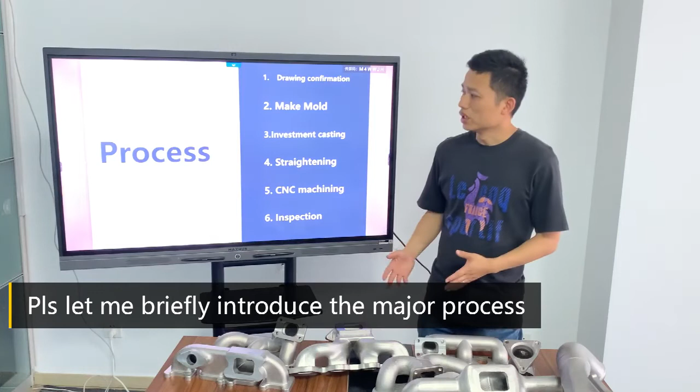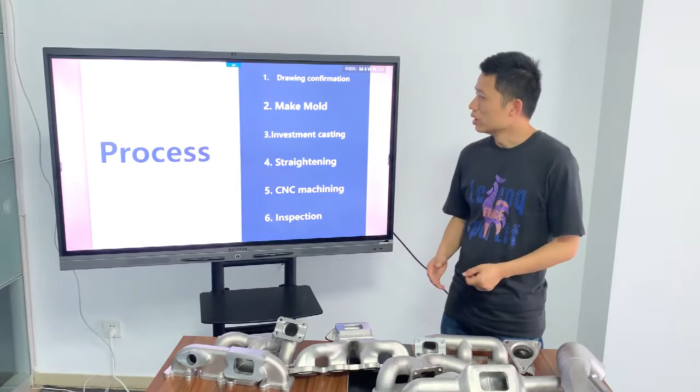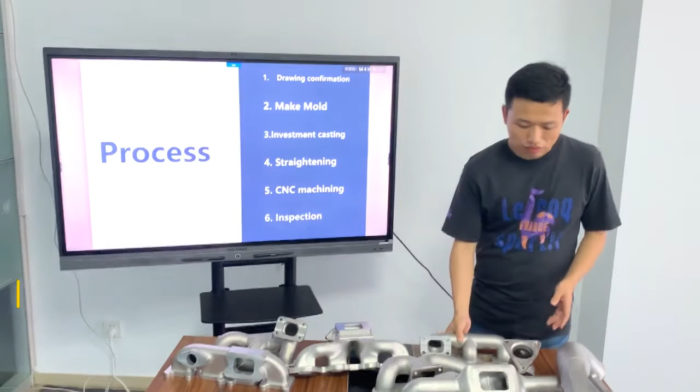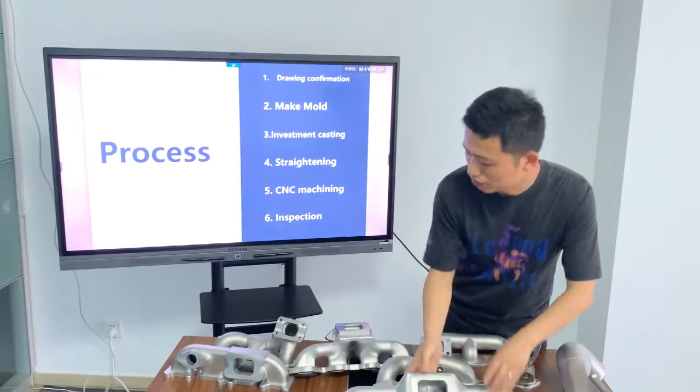Now please let me briefly introduce the process. It can be divided into 6 major steps. The first one is confirm the drawings, and once the drawing is confirmed, we need to make the casting mold. Number 3, it's very important to do the investment castings. Once the investment casting is like this, this is the investment casting part without machining. Once we got the investment casting parts like this, we need to do the straightenings. I will explain it later. The 5th step is to do the machining. Then we need to do the inspections. Now let me introduce the details.

The first step is to confirm the drawings. It is very important because we make the mold according to the drawings, and some drawings are scanned according to customers' samples. It is very important to confirm the drawing at the beginning steps.

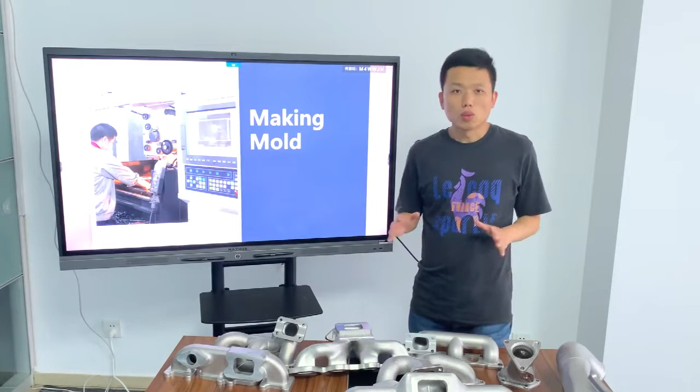Once the drawing is confirmed, then we will let our mold supplier make the mold. It is not easy to design and make the mold for the stainless steel exhaust manifold. The engineer needs to consider many things, such as the pour gate, the runners, and sometimes they need to use computer simulation to check if the mold design is correct or not.

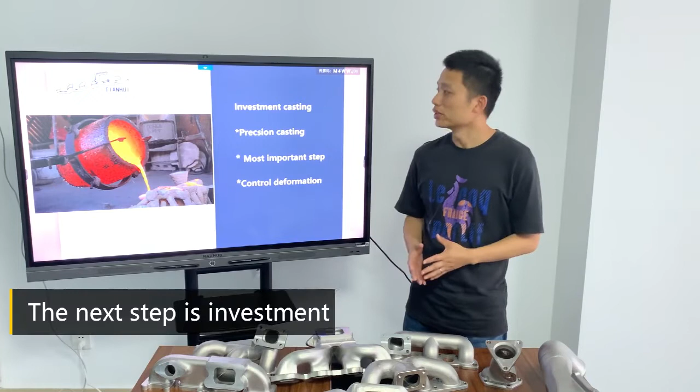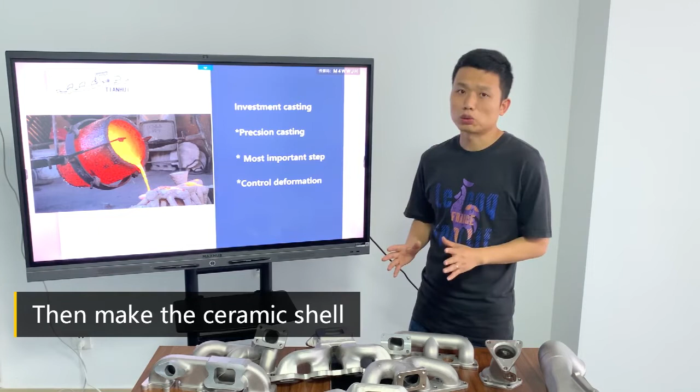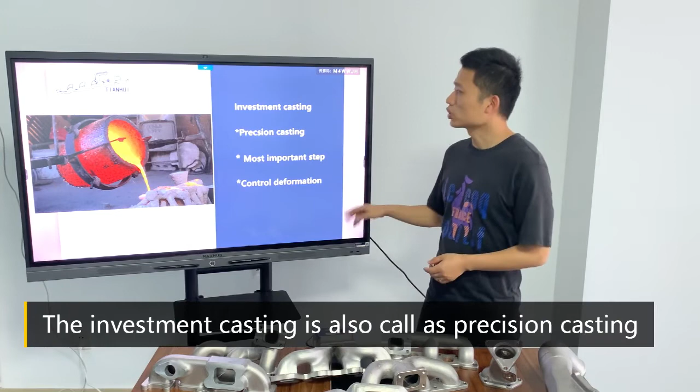Once we receive the casting mold, the next step is to do the investment casting. The investment casting is a very complicated process. We need to make the wax patterns, then make the ceramic shell, then pour the melting stainless steel into the ceramic shell to get the casting parts. The investment casting is also called the precision casting. It has a lot of advantages, such as a very small casting tolerance, very smooth surface qualities, and sharp details.

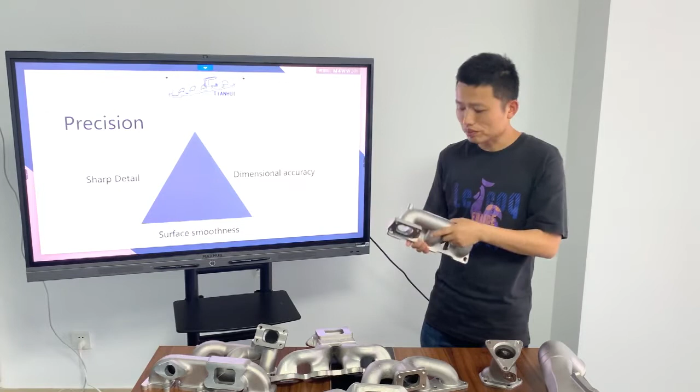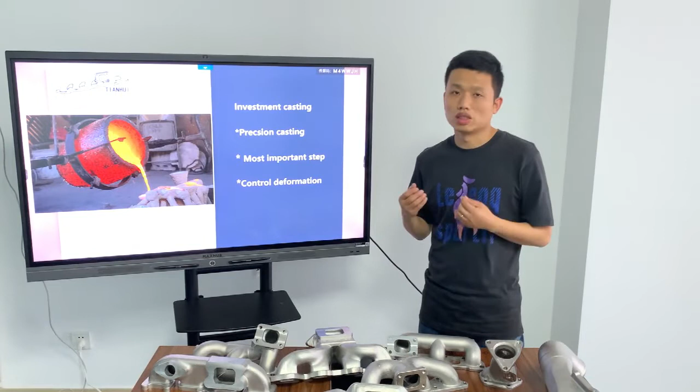The investment casting is very important. It is also very difficult, as the engineer must overcome many difficulties, such as deformations.

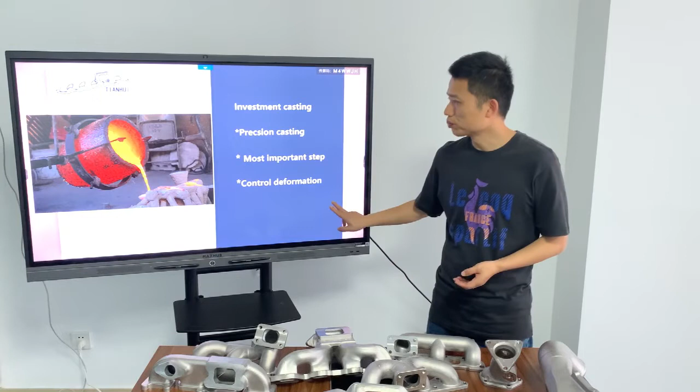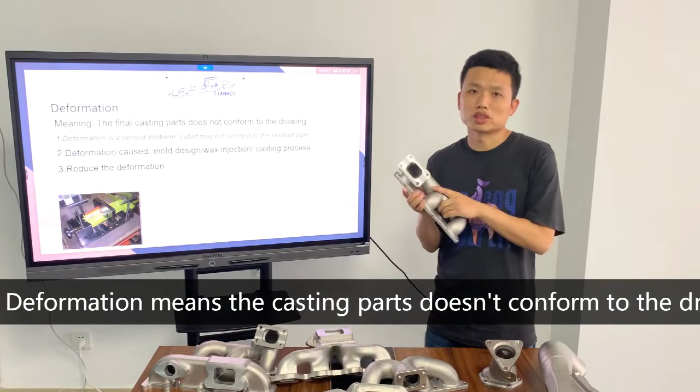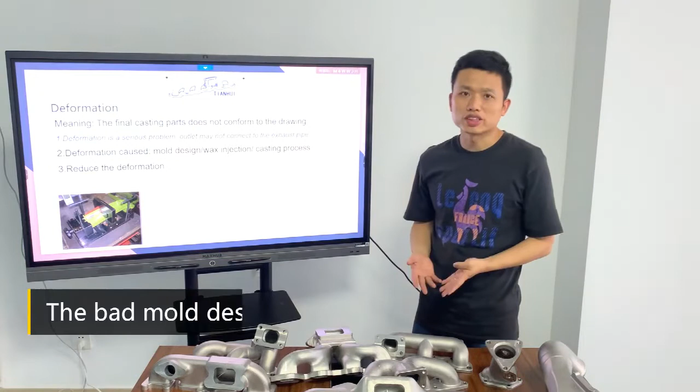What is the deformation? Deformation means the casting parts do not conform to the drawings. It is a very serious problem because in modern cars, the exhaust manifold is fit into a very small space. If the casting part is deformed, the outlets like this maybe cannot properly connect to the exhaust pipe. So it is a very serious problem. The deformation can be caused by bad mold design, high wax pattern temperatures, wrong casting process, things like this.

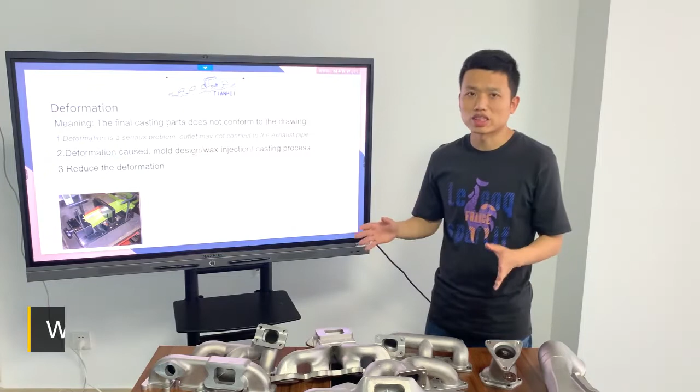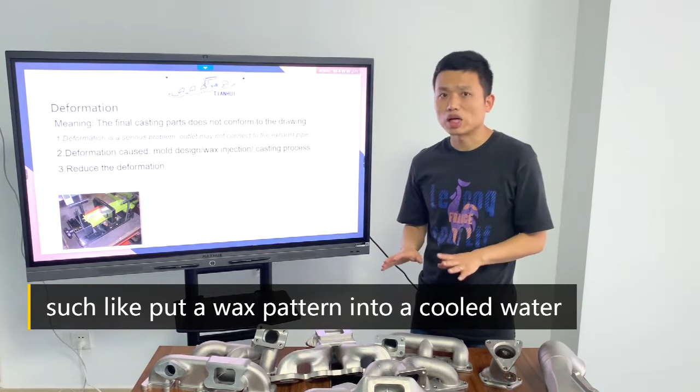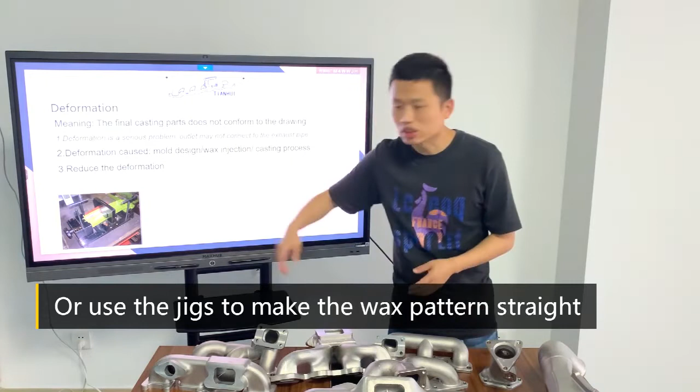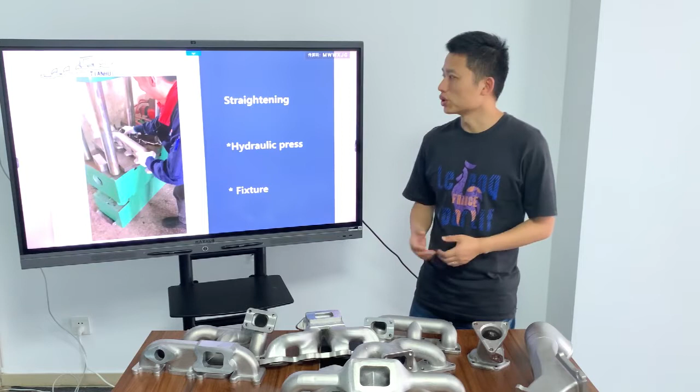As casting foundries, we need to do our best to reduce the deformations. Our engineers have rich experience to control and reduce the deformations, such as putting the wax pattern into cooled water to reduce the temperature, or using several jigs like this for the wax patterns. Although we have to do our best to reduce the casting deformation during the investment casting process, sometimes the casting part is still deformed. Then we need to do the straightenings.

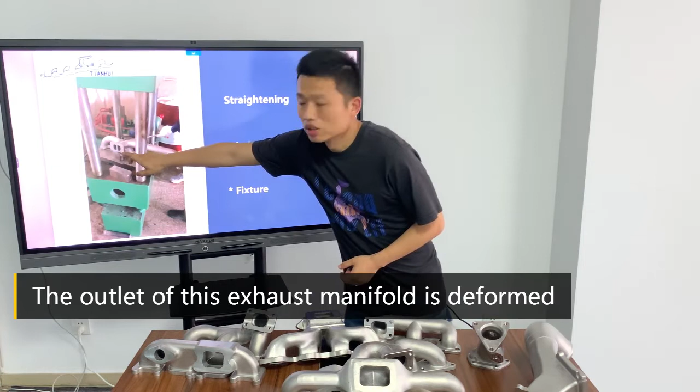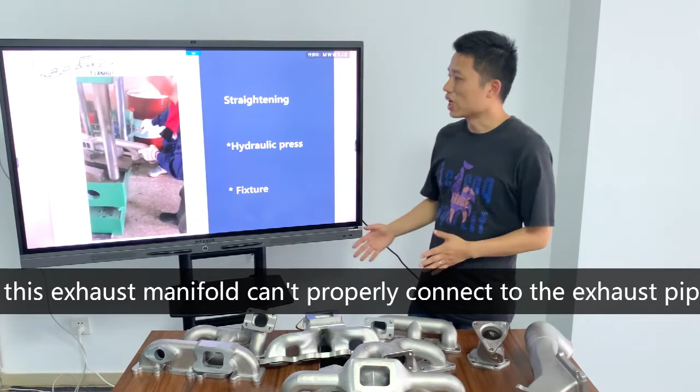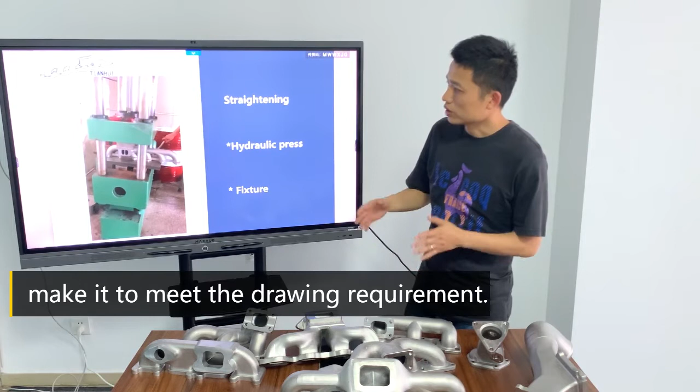The outlet of this exhaust manifold is deformed. If we don't deal with it, it can't properly connect to the exhaust pipe. So we must do the straightening. We use the hydraulic press to press this outlet, so make it reach the drawing requirement. So this is the straightening.

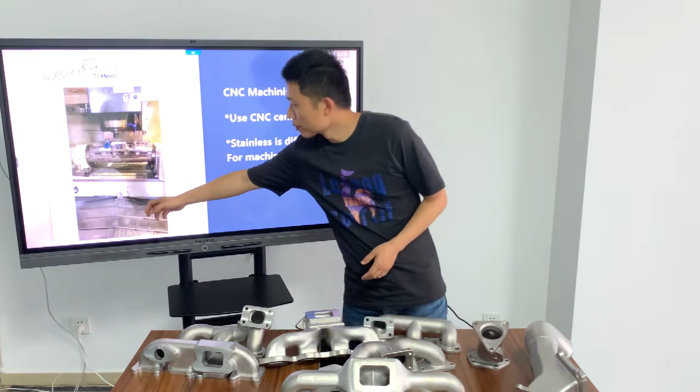It is very important. The fifth step is to do the CNC machining. Please watch this video, as you can see we have 4 CNC centers. This is the 4 CNC centers. We use the CNC center to machine it, so it has a very small tolerance. The machine surface quality is also really good.

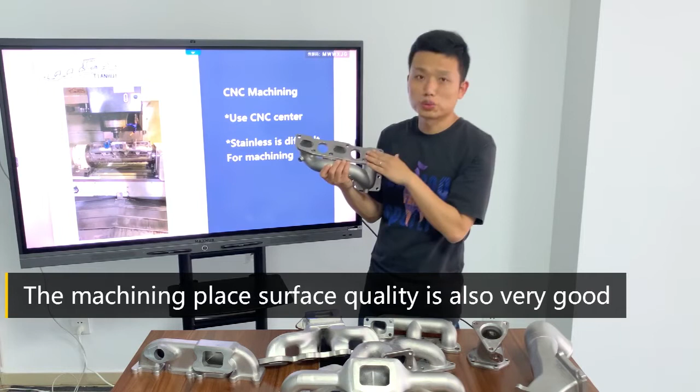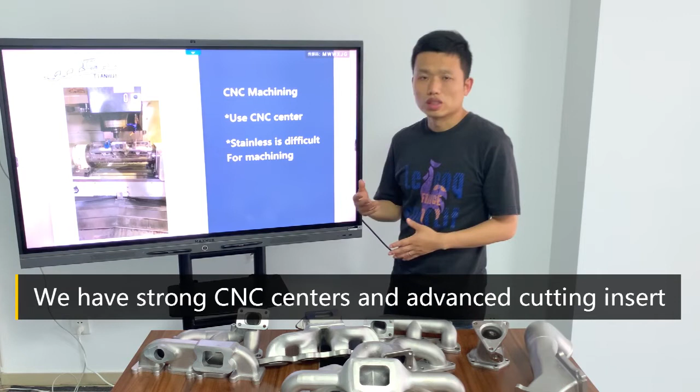Stainless steel is difficult for machining because it is harder and it will produce a lot of heat during machining. So our factory is very good at machining stainless steel. We have strong CNC centers and advanced cutting inserts.

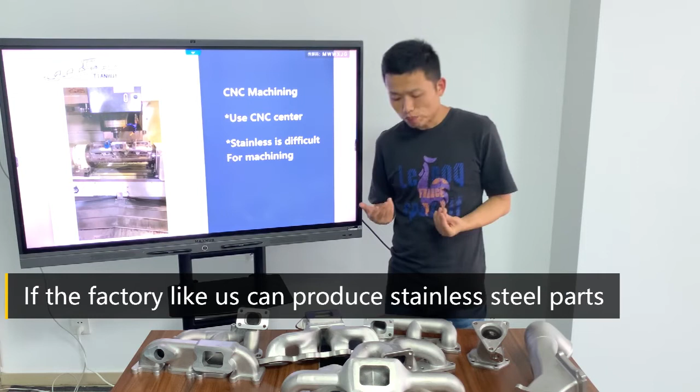As you know, there are two kinds of cast exhaust manifold: the cast iron and the stainless steel. If a factory like us can produce stainless steel, we certainly can produce the cast iron. But if a factory is good at machining cast iron, they may not be able to produce the stainless steel cast exhaust manifolds.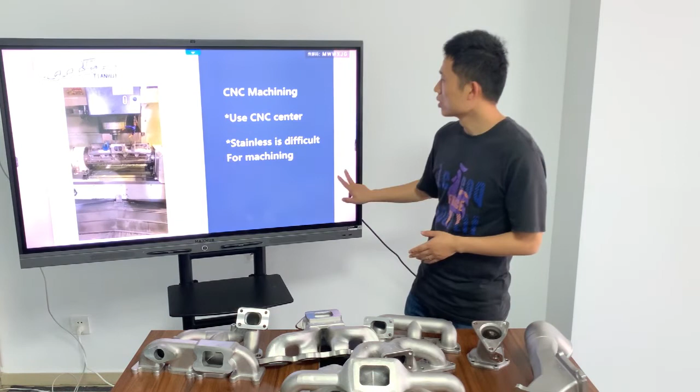The final step is to do the inspections. In our factory, we do 100% inspections. We mainly check the surface qualities, do appearance inspections, and we will check the dimensions of those machined parts.